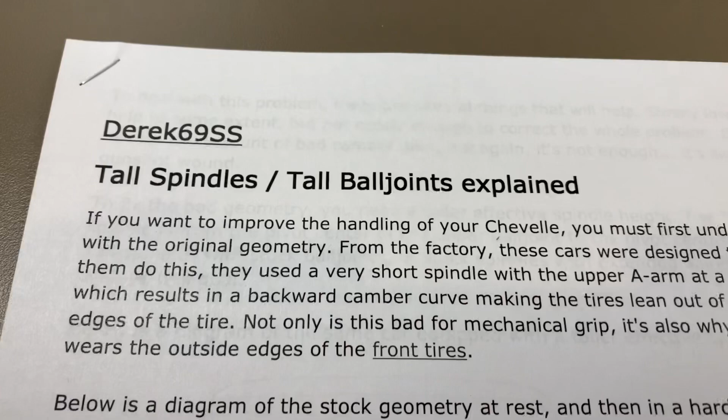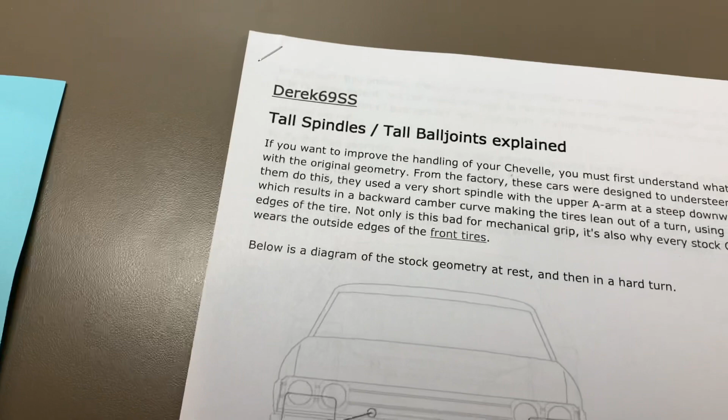First, I want to give credit to Derek 69SS. Like any car guy, I rely a lot on forums, reading and trying to figure out what's worked for other car guys, what's better, what parts are good. Derek 69SS did a post on Chevelle forums, chevelleforum.org, about tall spindles and tall ball joints explained.

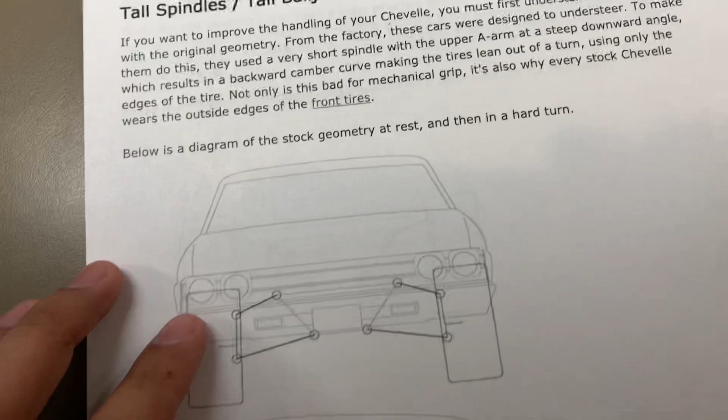He did a great job putting this together. I copied and pasted it onto a piece of paper so I'm not using the computer screen to explain this. You can go to the website and type that in, it'll take you to the post where Derek 69SS posted this. Well, here it is, I'll read it off for you guys.

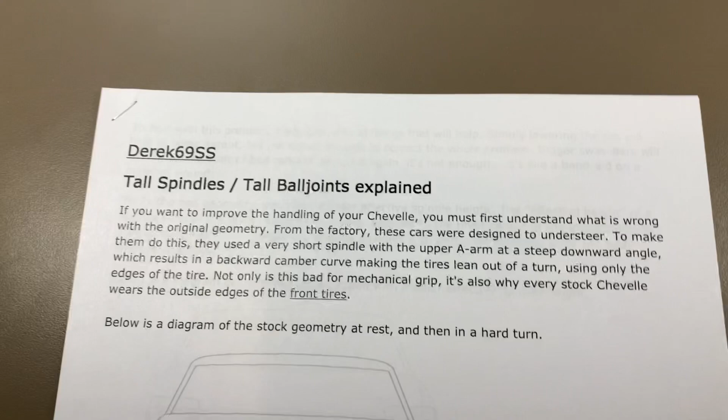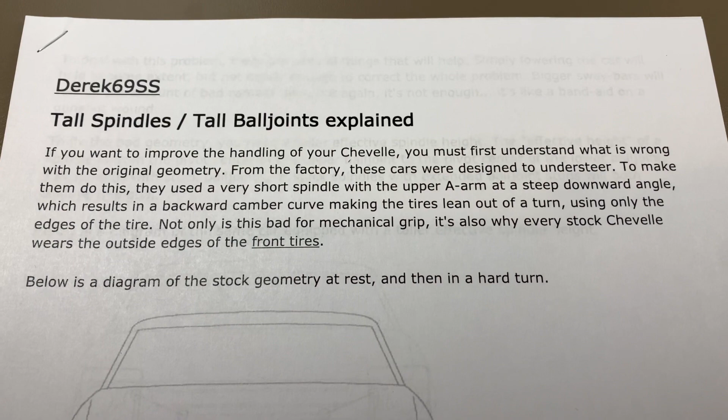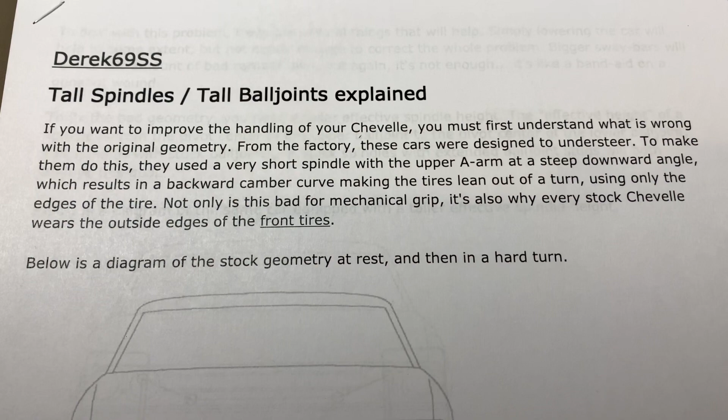If you want to improve the handling of your Chevelle, you must first understand what is wrong with the original geometry. From the factory, these cars were designed to understeer. To make them do this, they use a very short spindle with the upper A-arm at a steep downward angle, resulting in a backward camber curve, making the tires lean out of the turn using only the edge of the tires. Not only is this bad for mechanical grip, it's also why every stock Chevelle wears the outside edges of the front tires.

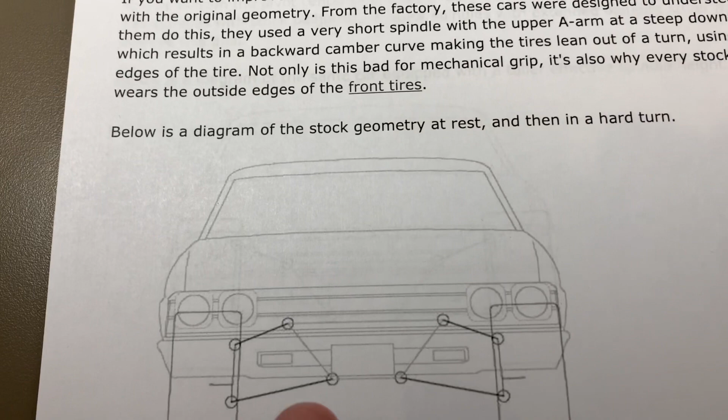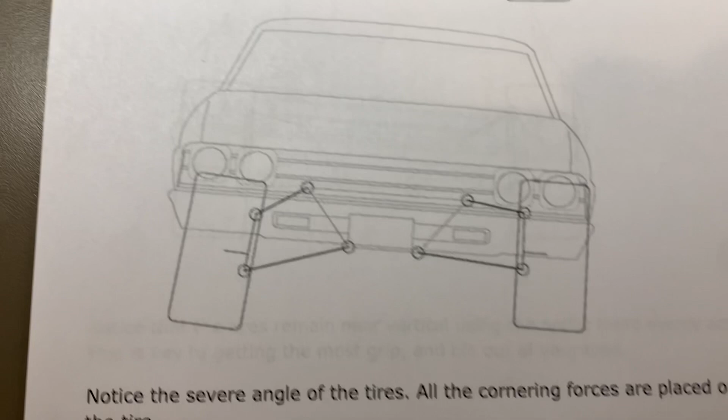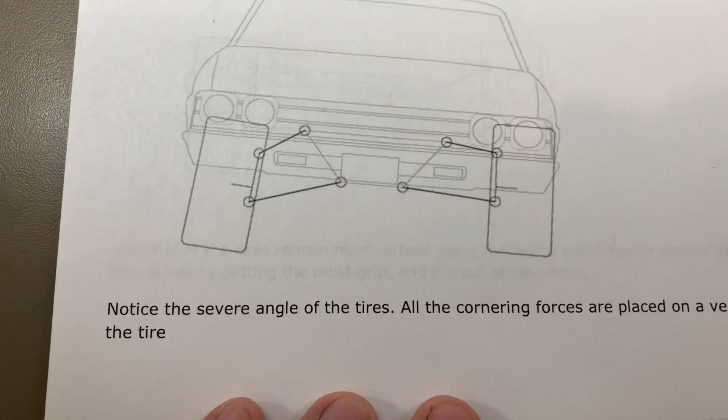Below is a diagram of the stock geometry at rest and then in a hard turn. That's your A-body GM just sitting, like Chevelles, Cutlasses, Skylarks, even Monte Carlos and El Caminos. This is how they sit, and this is what the stock suspension does when you're turning. As you can see, the outer tire tends to pull off the ground, leaving only a little bit of traction. Notice the severe angle of the tires, all the cornering forces are placed on a very small area of the tire.

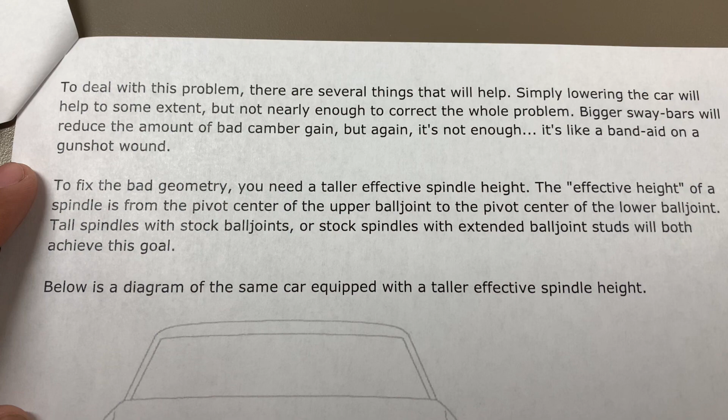Now it's time to address the problem. To deal with this, there are several things that will help. Simply lowering the car will help to some extent, but not nearly enough to correct the whole problem. Bigger sway bars will reduce the amount of bad camber gain, but again it's not enough—it's like a band-aid on a gunshot wound. To fix the bad geometry, you need a taller effective spindle height.

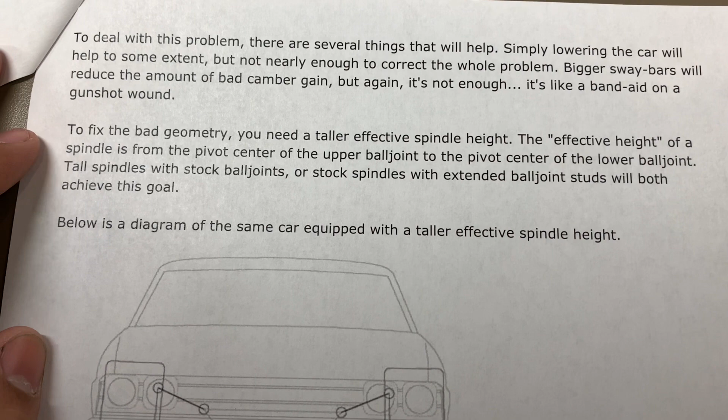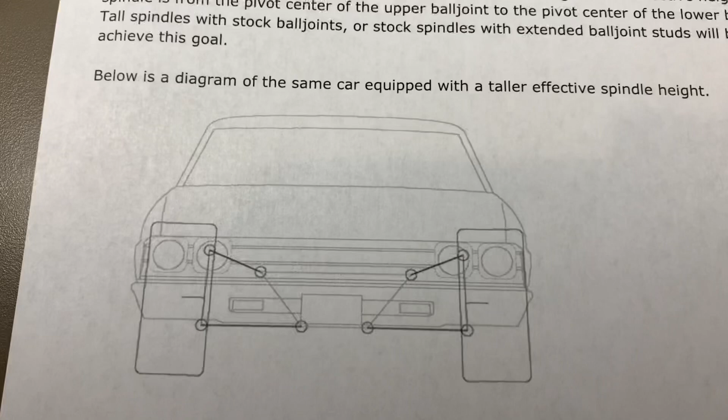The effective height of a spindle is from the pivot center of the upper ball joint to the pivot center of the lower ball joint. Tall spindles with stock ball joints, or stock spindles with extended ball joint studs, will both achieve this goal. So once you acquire the proper ball joints, here's the way the geometry corrects.

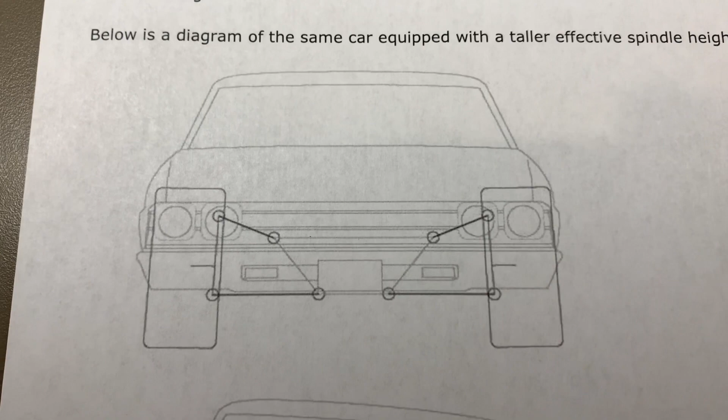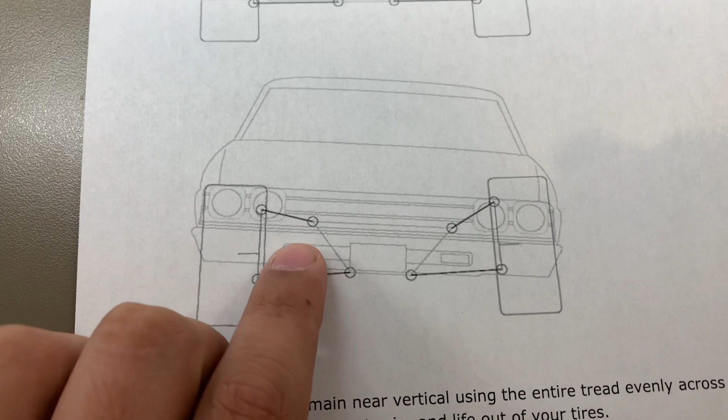Below is a diagram of the same car equipped with taller effective spindles—at rest, and on a turn. You see the tire has a lot more traction, and look at the geometry on the control arm. You see the taller upper ball joint and taller lower ball joint, both are taller. Now take a look at the previous one, how the suspension sits, the control arms and ball joints—it's a shorter distance compared to the other one once it's corrected.

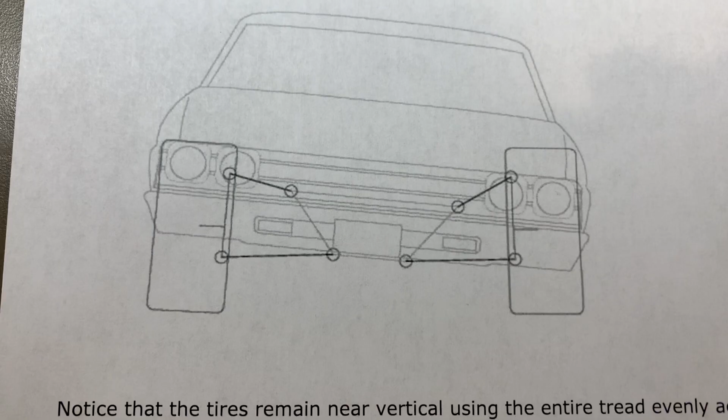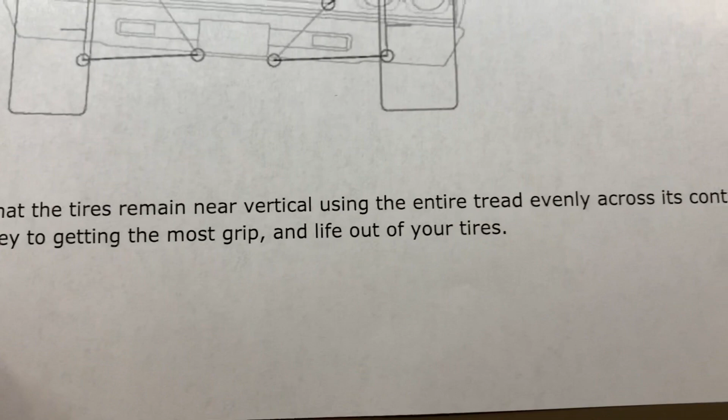Again, look at that. Once it's corrected, notice that the tires remain near vertical, using the entire tread evenly across the contact patch. This is key to getting the most grip and life out of your tires.

So why would you do this? Well, on a day-to-day basis, you want to keep your tires wearing out evenly, and you want to gain the most traction out of your A-body GM.

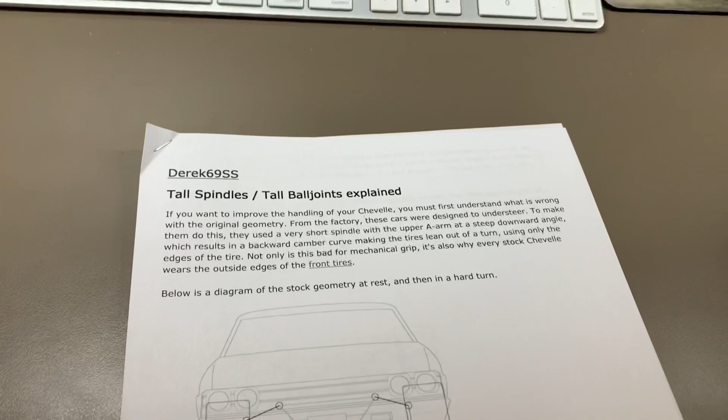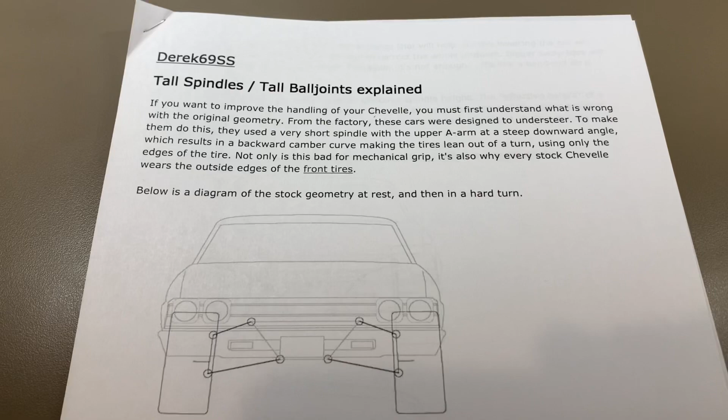And the reason I'm doing this is because I just purchased tubular control arms, and if I'm already going to go through the trouble of taking everything apart, might as well do it correctly and do this correction. Different places sell these ball joints—I got mine from Rock Auto.

So many places sell these ball joints. I got them from Rock Auto. Here.

So I got them ProForged. This is the part number for the front upper and the lower. They are recommended for each other.

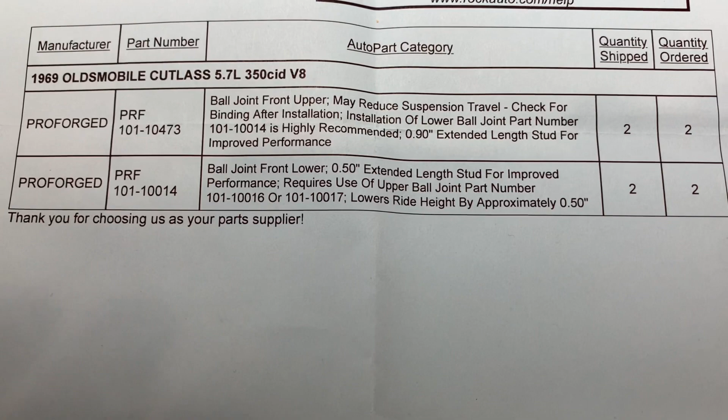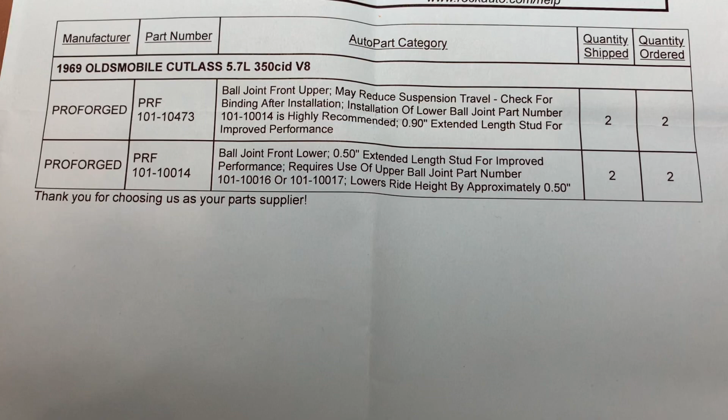So here, I'll show you guys what it looks like. This is the upper, and just by feeling them, it's a better quality ball joint. The control arms I got has terrible ball joints on it that everybody recommended changing if you purchase those control arms. But yeah, just feels like good quality. This is the upper and here's the lower. So good investment.

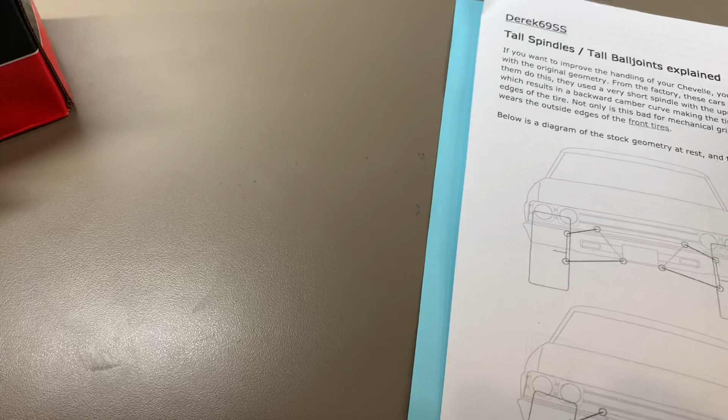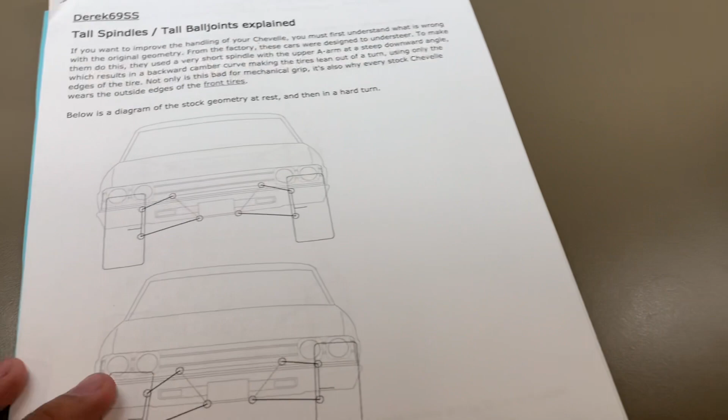I'll do a video installing this whole deal, so you guys at home can also try this out if you want to. Again, this is all stuff I've been reading, and all credit goes to Derek69SS. This is just me doing my research. There's plenty of forums out there that explain this, but in my opinion, Derek did a good job at just laying it out with instructions and images, and overall it was the easiest way to understand it when he explained it. So again, credit to him, and I'll see you guys later when I'm working on this thing.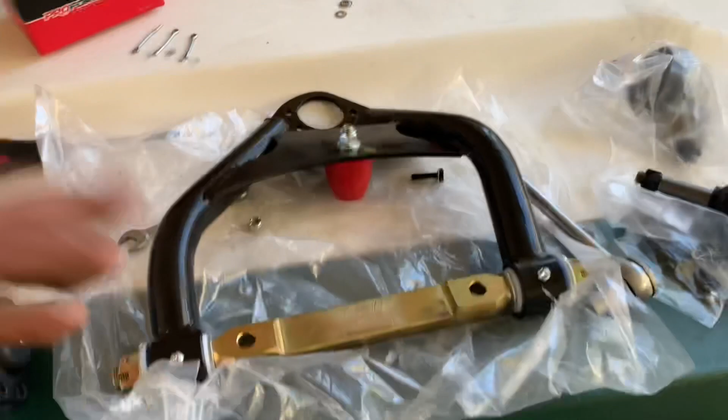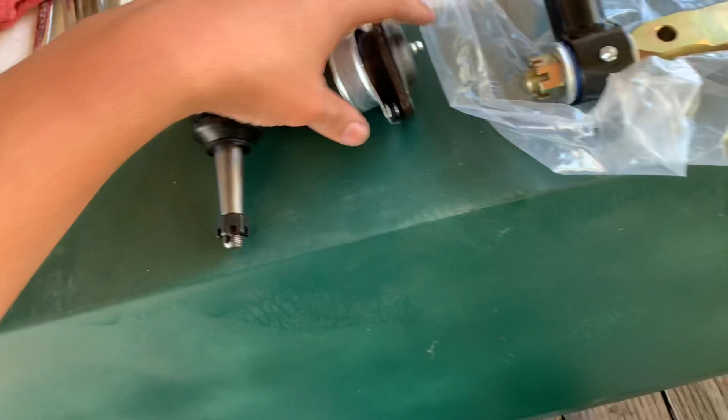All right guys, so like I explained to you guys, I was gonna switch the ball joints. So this is the new ones, these are the taller ones, and these are the ones that came with these control arms. You can see there's a huge difference there. Also, just a side note, when I remove these...

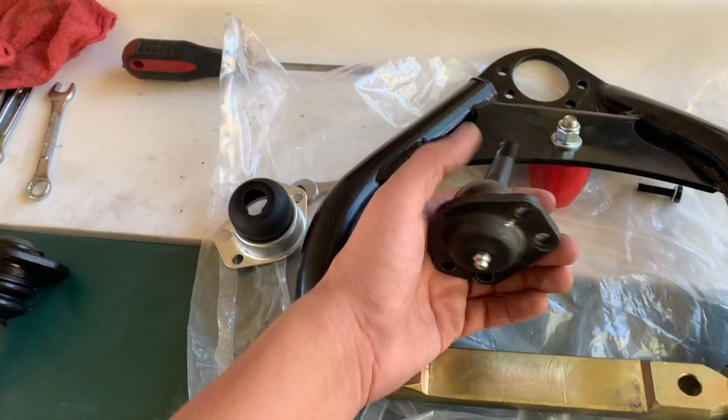I remember reading when I was reading the reviews for these control arms that you can get, I think you can find them on eBay, in between like $250 to $350 - the cheap tubular control arms for A bodies. There's some on Amazon too, I don't know, but anyway they kind of look like this. A lot of reviews said the ball joints are crap, you should change them. That's why I started looking into it. But I remember reading a review about this guy whose ball joint fell apart at like 50,000 miles, and look at this thing - there is no grease whatsoever inside of this ball joint.

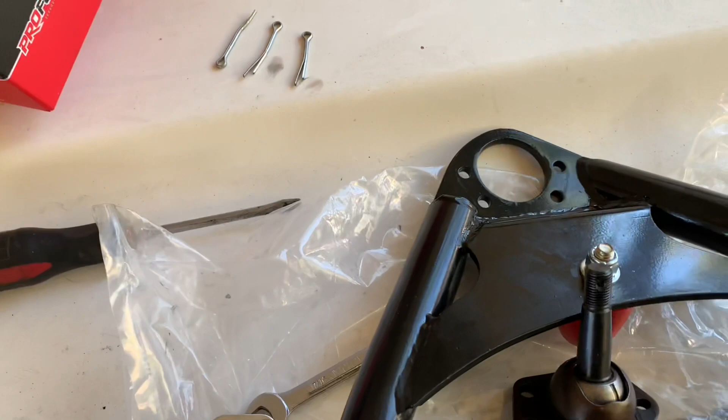And I opened the other one, which I already put away, but I opened it and already locked it, and there was grease inside of it - I don't know, it might be a quality control problem. The other one had a lot of grease coming out of the edges, way too much. But this one has no grease, which could explain why some people had issues with these. I know everybody pre-greases them and so on, but it just shows the quality control on this stuff. I don't know, take it however you want to take it. But anyways, back to it.

These are the new ones for the upper control arm, and then I'll do the lower control arm. Just want to show you guys what I'm working with.

Okay everybody, as you can see there's a ton of parts here. We're gonna do the control arm swap, tubular control arm for A body GM. This works for Cutlasses, Chevelle, Skylarks, Monte Carlos, El Caminos, and they sell these obviously Chinese control arms, but they're super cheap and built pretty strong except for the ball joints. Like I said earlier, the ball joints need to be replaced for better brands. But we're gonna do control arms, and then we're gonna do the brake kit.

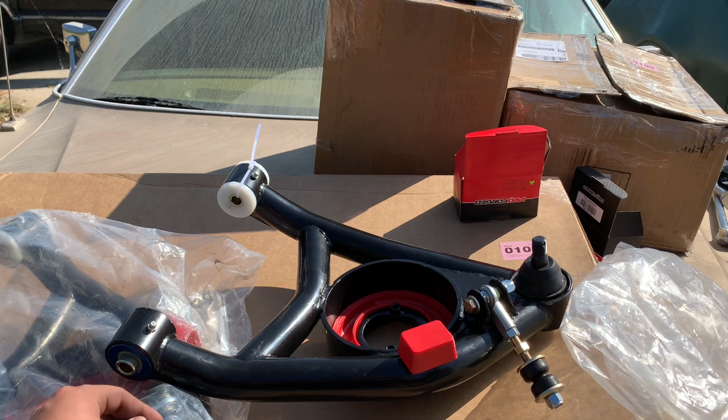So we're gonna do one video for the control arms just to get that out of the way, and then we'll throw a second one for the disc brake. But right now we're gonna lift up the car and start removing stuff.

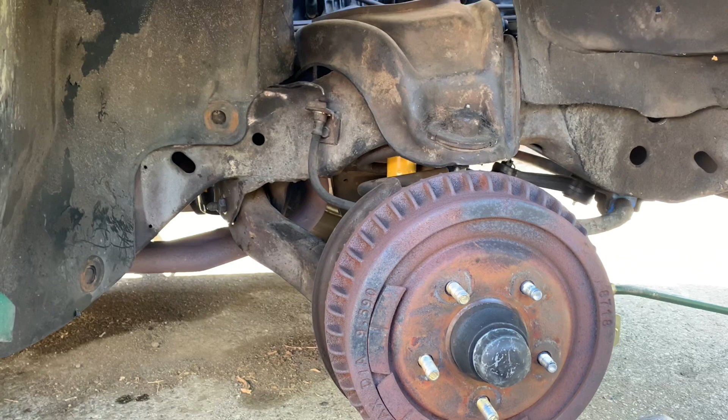All right, for you guys who've been on the channel for a while, you can tell this is not the first time we've been down here for this. We tried doing the control arms before, but they don't fit with drum brakes unless you cut a notch on this plate right here on the backing plate. Then you can fit them if you really wanted. But we just waited and got the whole kit, so that means we don't gotta worry about drums anymore.

We're gonna throw these to the garbage unless somebody wants them. I don't know who wants them, but we're just gonna get rid of that stuff. It's gonna be time consuming removing all this. We'll try to film as much as we can and let you guys know how it's done. But pretty much what you need to do is take care of these bolts right here. Actually, let me go back a little bit.

So the shock comes out first. After that, we need to pop the ball joint nuts here, top and bottom, and remove the drum assembly. If you're gonna keep your drums, hang them to one of these holes so they don't hang down and damage your line. But we got new lines and new disc brakes, so this is going out of the way. We'll remove this, remove the line, get the drums out of the way, then focus on removing the spring, which is the sketchiest part of this. We'll show you how to do it safely if you don't have a spring compressor, but ideally you want one.

So shock comes out first, and then we can do the drums and so on, moving up the way. So we're gonna take care of that shock. The way you remove it, there's two bolts down here and one at the top, and it's out after that. You just pull it from the bottom. All right, so the shock is out. Like I said, two bolts on the bottom and then that top one, and it's out.

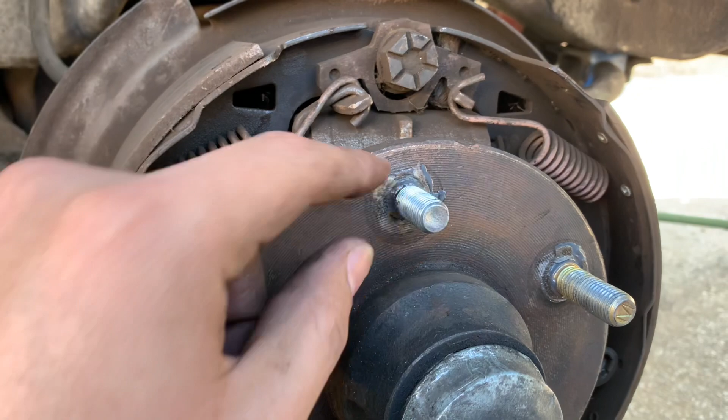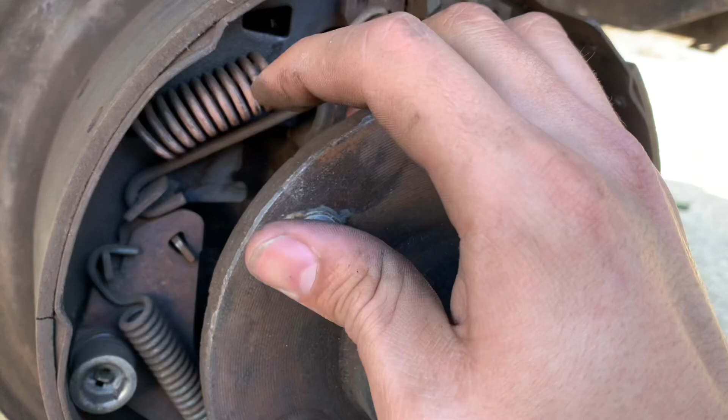A tip: what happened with me was my studs were spinning right here in the hole, so it just kept spinning. Even though I got new studs and pressed them in, it would still spin because all the material in there got worn out, so it wouldn't hold. A friend said, hey, just throw a bunch of JB Weld on there and it's gonna hold up. And yeah, it held up. It's been solid for more than three months now, and I've driven it to work, about 10 minutes a day back and forth, and it seems to be doing fine. It's sketchy, I get it, but if you're ever in a hurry or need your car to run for a week, just throw some JB Weld in there, put it back together, let it dry enough, and it works.

So next we're gonna tackle the ball joint nuts there and try to get them out. As you can see, we're just gonna let this thing bleed.

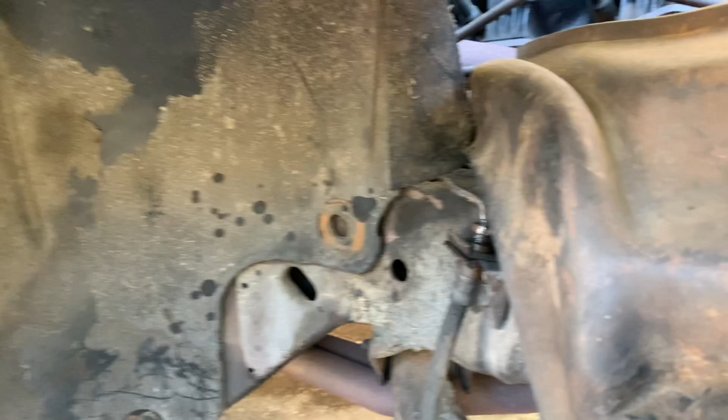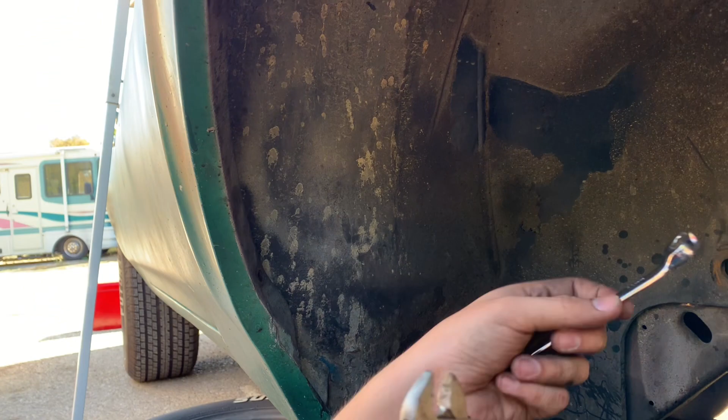Now you want to be careful with these brake fittings if you want to reuse yours. I believe my kit comes with new ones, because what happens is they're so old and rusted that you'll bend the piping or something, so you want to be super careful. I put a shit ton of WD-40 in there and let it sit for a few minutes, then use a flare nut wrench like this, because you'll get most of the nut in there and won't strip it. As you can see, somebody did this previously and stripped the shit out of it, which is annoying, but it happens. People do it. So make sure you're careful with this if you plan on reusing yours. For me, I don't give a shit at this point, but I'm still doing it properly.

Okay, there it is, it's out. It might leak a little, it's gonna eventually start leaking down. It's doing it slowly right now, but okay, that's out.

So next we're gonna get the whole assembly out. We need to pop this nut right here on this side, and then the bottom one, but we'll show you guys how that's done. Now what you can see here is we tied the spring to the chassis, or anything here you want to use.

So when you release the pressure of the spring, we're gonna show you how to do it. We're just gonna place the jack under the arm and slowly lower it, and then you should be able to get a pry bar and just kind of get the spring out. It's not gonna have too much tension, but as a safety measure, it's always a good idea to just tie it somewhere, so if it actually does pop out, it gets held and it only goes so far. So that's just one thing to think about as a safety measure.

Actually, we need to remove the tie rod. I forgot about that. Yeah. But let's see. Get a screwdriver. Put these here.

The $1 pliers. Yeah, they're all fucked. Mine too. That's what they say. Buy quality tools and you only buy them once. Right? Yep. But we're fucking poor, so we can't buy good shit. Plus, if we spend too much on tools, we can't buy cool car parts. So it's another thing to think about.

So to keep things out of the way, you probably want to get a bag of zip ties. So what I'm gonna do is remove the tie rod and then zip tie it to the sway bar, get it out of the way as much as I can, so it's not hanging everywhere or you damage it or something. So ideally you want to get your mallet. There's some zip ties inside. Yeah. You got your mallet or you want me to?

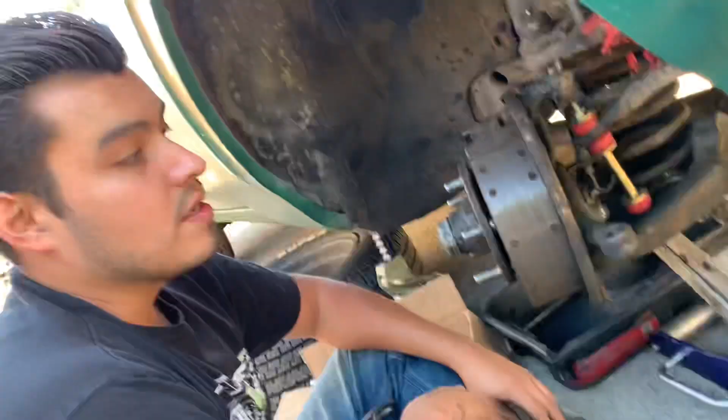I have mine. All right, so as you can see, tie rod's here. We already removed the nut right here. You gotta pull the cotter pin and then remove this. There's not a lot of pressure on this. Now, one of the things to keep in mind, we already have our jack under the car and it's putting pressure on the spring, so this thing can't release pressure.

It's stuck right now. So in the best world, you just tap this a couple of times and it pops out, and that's like best case scenario. But with the way things go with us, that never happens. So I'm gonna try to hit it a couple of times, and hopefully this thing pops up. If it doesn't, then we're gonna need to get the remover. I'll show you guys what it is.

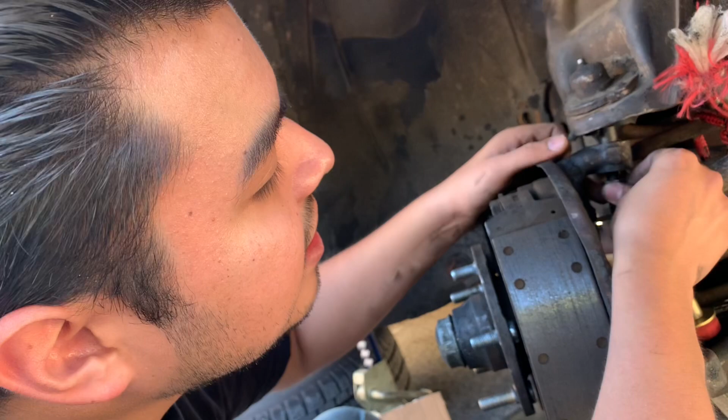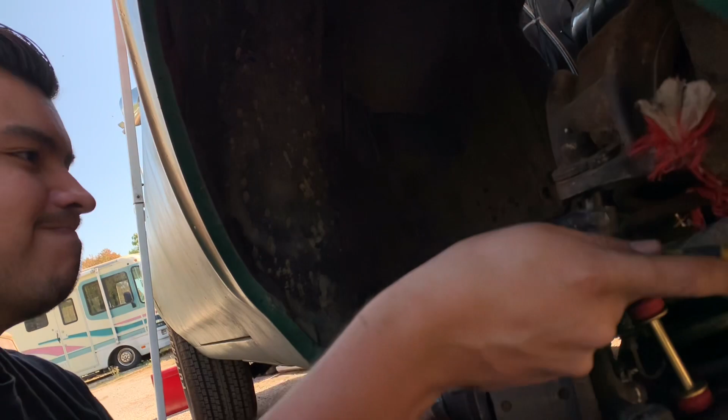So one thing to keep in mind, you want to keep the nut still in there a little bit loose in case this thing does pop up. It gets stuck on the nut. I forgot about that. You don't want to forget about that. That's dangerous. All right, there you go. Oh, there you go. That's it. Okay, so you saw that. I released the pressure. This is out.

So now we can slowly lower the jack, or ideally remove the bottom nuts, which wouldn't be a bad idea, so we can just get the whole assembly out. Yeah. Put it on the side. All right, so that's for right now. We'll get back to you guys on the rest.

Okay, so we removed this brake line here. Like we said, we're not gonna reuse this. This is pretty worn out. It did what it did. 60 years, 50 years of service is done. So what you want to do next is remove that nut on the bottom and pretty much pick up the assembly and put it to the side and tie it up somewhere if you want to reuse it.

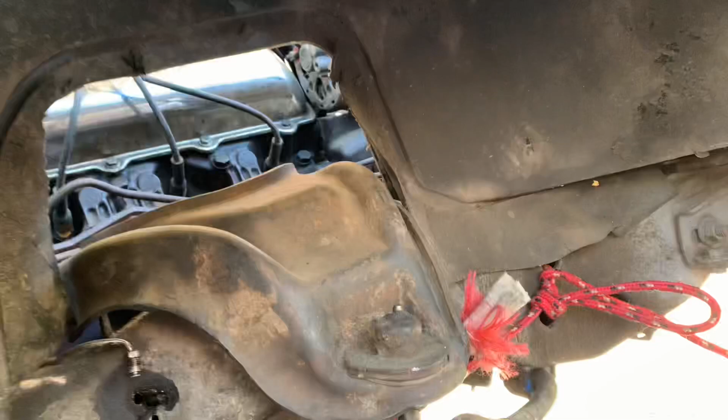Yeah, look at that. I think it moves a little bit. What the hell? So yeah, this is my daily driver too, so it's fucking shitty. This is gonna be a big improvement for us. So what we're gonna do is just lower it and try to get that spring out, and we can remove the control arms. Like we said, we're not gonna reuse this, so we're just gonna save ourselves some time and try to do this as fast as possible. So yeah, just hold on there, everybody.

Also, you want that sway bar link out. It's easier with a power tool. You just get it out, and your homie can help you out. Ideally, with a scenario like this, you probably want somebody to help you out. Got it? Almost. Might need an extension. Now you're tightening.

Hold on. I got this shit. There we go. Stay there, baby. And then, like a glove. Probably need an extension, dude. If I do an extension, it's just gonna hit the floor. So, maybe if I can flip this fucking tool. It's just a bitch to fucking put in there, bro. I fucking hate these fucking tools.

There we go. It's just a little bit crooked, the whole thing. There you go. Fuck it. That's backwards? It's coming out. Okay, we're out. Yeah. Alright.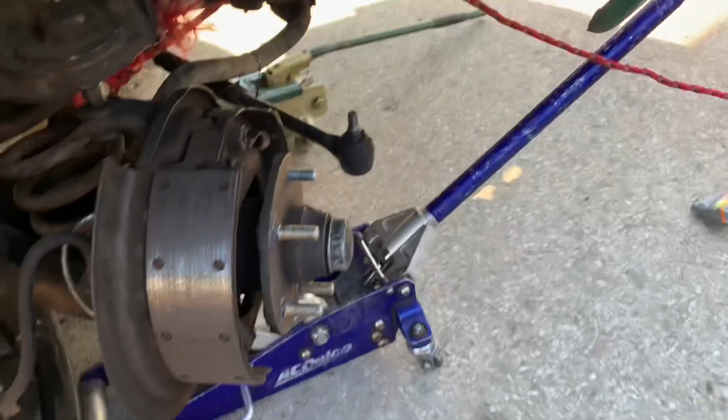Like we said, the spring is the sketchiest part, so now you can remove this top nut. I don't know if I'm tightening. All right, so we removed that top nut. Now, again, you want to make sure there's pressure on the spring so that thing doesn't come down and hit you on the face. And now we got it tied up here, and then Serge is going to release pressure slowly from there until it gets as far as it can to the floor.

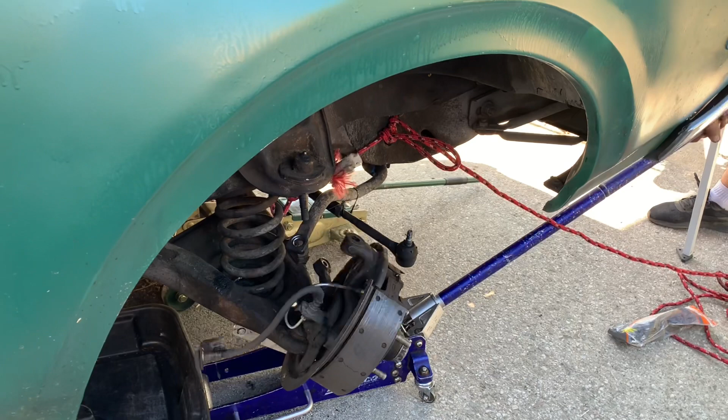Here we go. Wait. There you go. Yeah, go for it. Slowly. Slowly. Oh, dumbass. What? I went slowly, fool. Oh, no, just keep going, yeah. Dude, I think you need to push in the, oh, there you go. No, it's going. That's slowly. This is so sketch, dude. It's done. Oh, there you go.

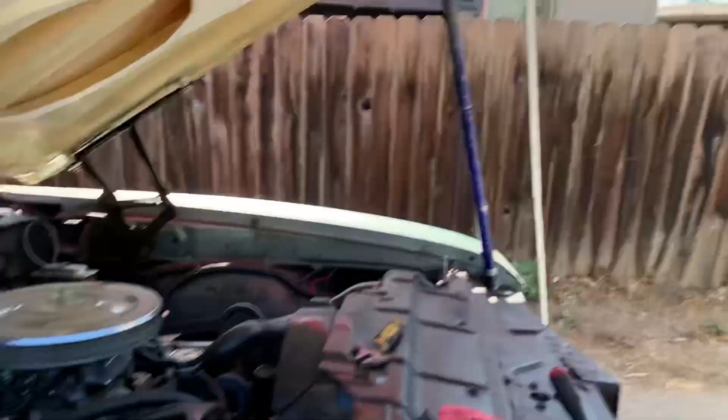Now we should be able to have like a pry bar or something and kind of get that thing unstuck. Yeah. Where's our pry bar? Oh, dude, just swap those and we can use that one. Yep. Oh, that open one here. Alright, hold it. So we got our... There you go. Don't fall. So we got... kind of like nail style. All right, you want to hit?

Yeah, there you go. It's not a lot of tension on it right now, just a little bit. There you go. And it's out. Yeah, it's free, fully out. So you see, that's a little bit safer than actually losing your head or your arm. Yeah, exactly. All right, so now we're gonna pull that spring out, and then we can start actually removing the bottom control arm, the lower control arm.

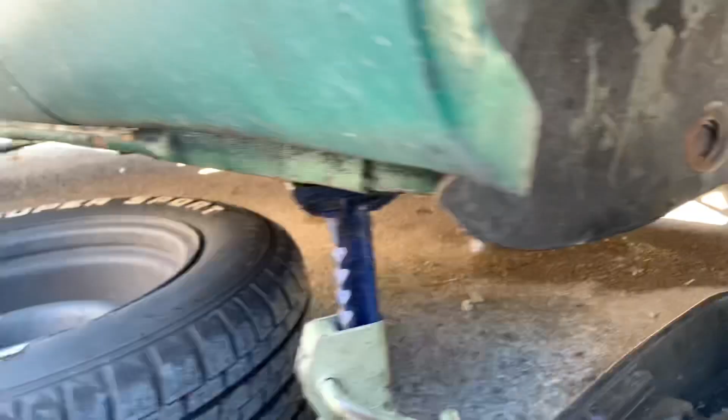There you go. All right, now that your spring is out, you just gotta remove the control arm. So this is how you remove it. I think it's a 19 millimeter. Yeah. And just gotta use force. There's no space to fit anything. Let me get a little extension. Shorter? You might need the short one, dude. 19? No, I have it here. Throw some WD-40 on this shit.

All right, so you need a 19 millimeter for this. It comes out from here. There's two of them for the bottom one. It's this one here and then the other one over there. Coming in hot. Fucking miracle you get this thing out.

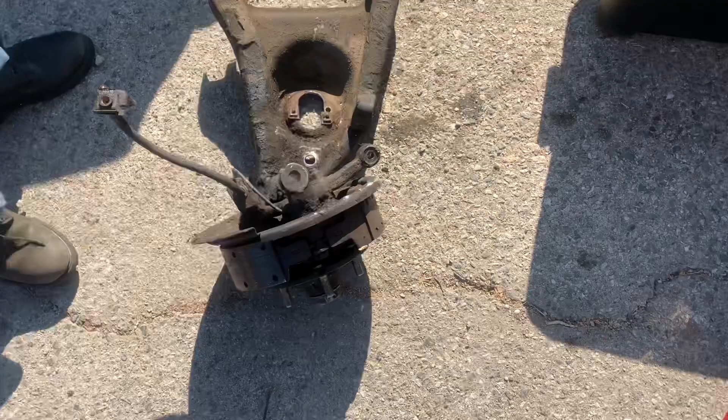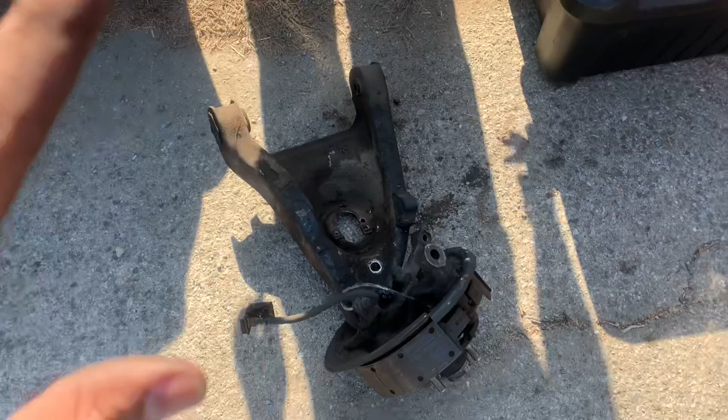There we go. That's like 60 years of GM parts. God damn. I was daily driving that fucking thing. Look at that. Fucking bushings, dude. Look at that thing. Now, ideally, you could press this out and clean it up and use it again. It's made to last, but we got new shit. This is the future now.

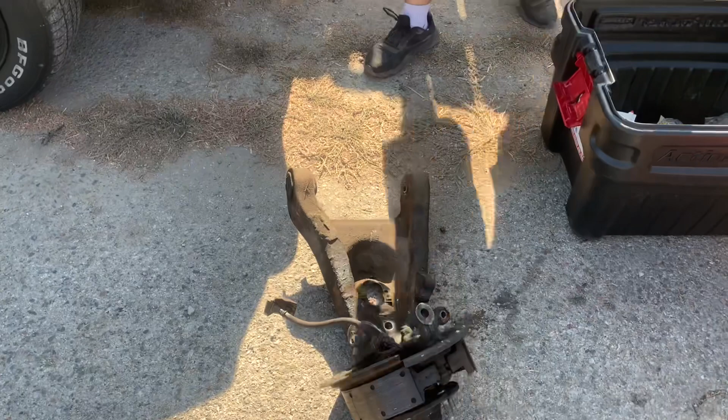Oh, look at that. Look at that. Don't judge me. I'm surprised this fool didn't die. The gods of hot rodding was keeping me safe. Oh yeah. It could have snapped any time. Dude, you should see that ball joint. That thing is bad.

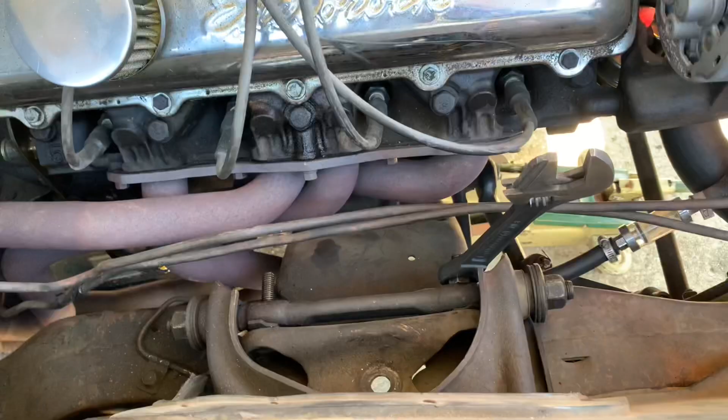Alright, so next we're going to remove the upper control arm. So all you really need to do is remove this bolt, this one here, and this should come out. It's not too much. Alright, so upper control arm is out. That's where it's going to lay for the rest of its life. Now it's time to start installing new parts. Yeah, it's gonna get interesting from here. Got stuff that came from other parts of the country and other continents, so we're just praying everything slaps together correctly. China. Came from China.

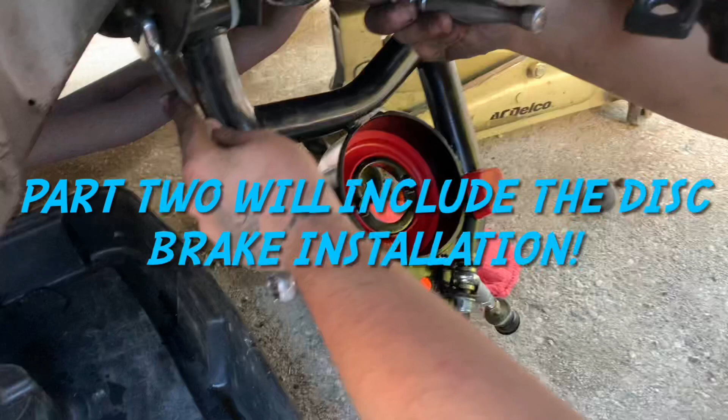Alright, so we got the upper control arm bolted, lower control arm is bolted. You gotta wiggle that one a couple of times. That one's a pain in the ass. Up and down, we had to use the jack to kind of put it up on this side, but it worked out. Now we're just gonna tie everything up and keep moving on.